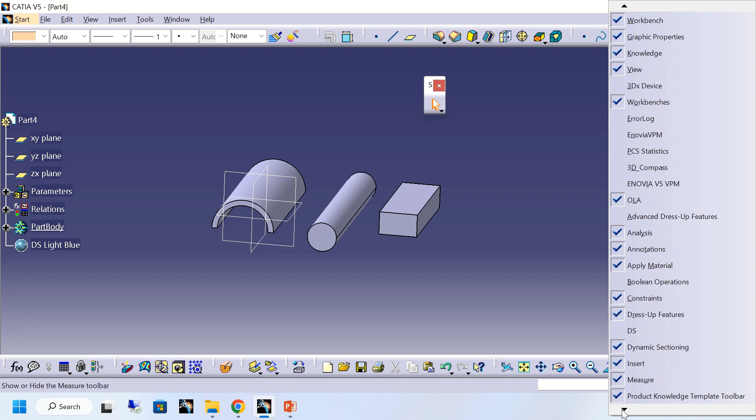अब मेजरिंग टूल नहीं मिलेगा तो यहाँ पे जाएंगे, here this should be checked on, or you can go to insert and here you will get some measuring tool.

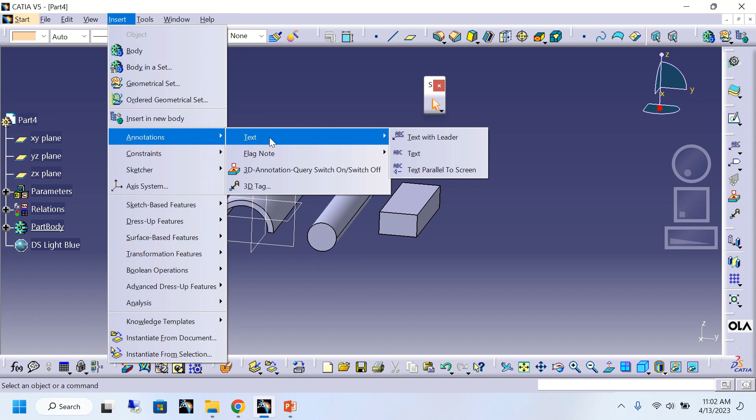टूल्स व्यू मेजरिंग टूल कहाँ गया? जैसे हियर इट इज मेजरिंग टूल। सो यहाँ पे मेजरिंग टूल वर्कबेंच में 3 टाइप का

3 टूल्स रहता है। एक है मेजर बिटवीन, एक है मेजर आइटम, एक मेजर इनर्शिया। मेजर बिटवीन मतलब 2 ऑब्जेक्ट के अंदर डिस्टेंस कैलकुलेट करना है, या कुछ एंगल कैलकुलेट करना है, या कुछ भी 2 ऑब्जेक्ट के बीच में वो कैलकुलेशन को मेजर बिटवीन बोलते हैं।

इट मे बी योर पार्ट प्रोडक्ट, देन बॉडी, ज्योमेट्रिकल सेट, ज्योमेट्रिकल एलिमेंट। So then second one is measure item. As the name defines item, so the item may be your part, product or body.

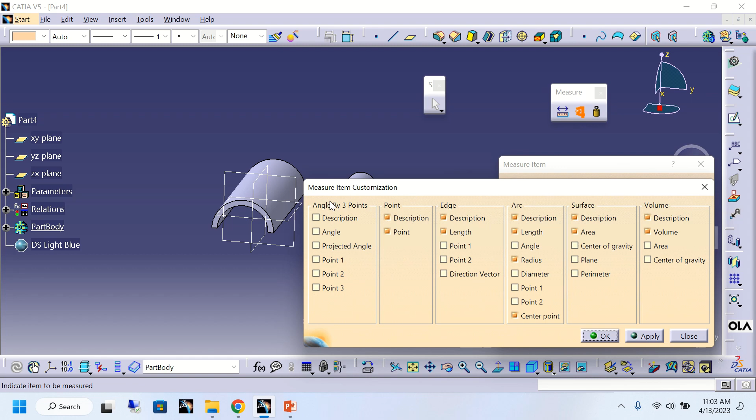And one thing you remember, in measure item you will calculate the properties of the product. Now, the third one is your measure inertia. Measure inertia, there are 2 types: one is 3D inertia, measure inertia in 3D, and measure inertia in 2D.

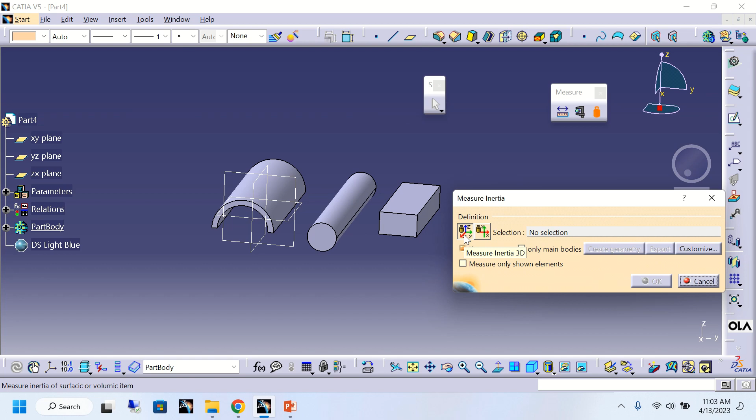So one by one we will cover the measuring tool in Catia. अभी क्या करेंगे ना, मेजरिंग बिटवीन। तो मेजरिंग बिटवीन में पहला मेथड है कि measuring between, it is the normal measuring between, and the selection mode you can define the selection mode, selection 1 and selection 2.

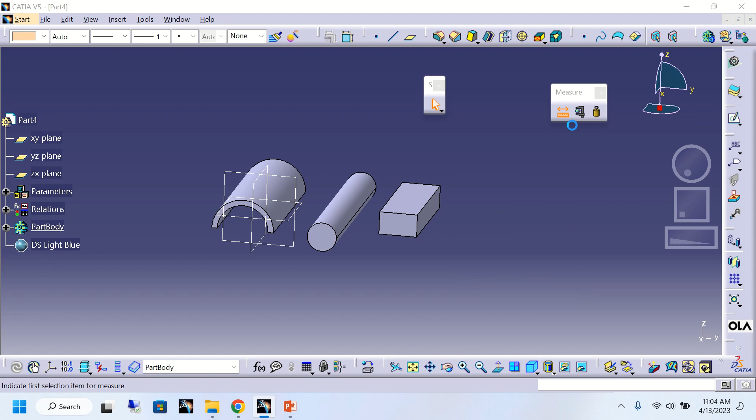As you can see here, any geometry means it may be your part, product, body, line, geometrical set, anything it will pick. Then any geometry infinite, so any geometry infinite. So here any geometry means it may be your surface or line.

Line point, anything. And third one is picking point. Whatever the point you want to pick, I want this point distance. So this picking point I will calculate, means I can use the point only. So only point will be selected.

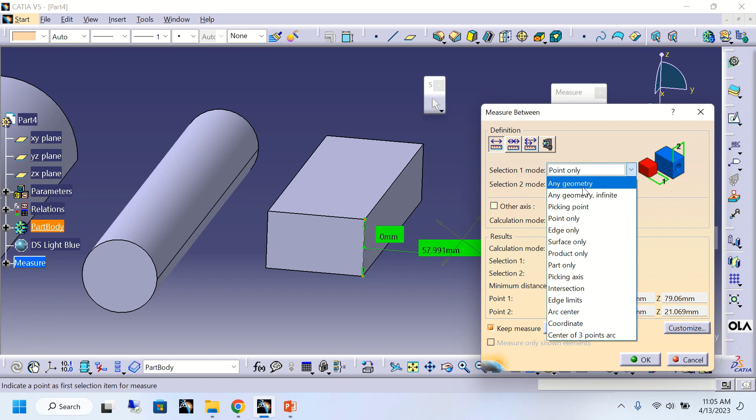Only selected. Now come to the edge. Only edge will be selected, no point will be selected. See, only edge will be selected. See, I'm pointing out the point, but point is not selecting. Only edge is selecting.

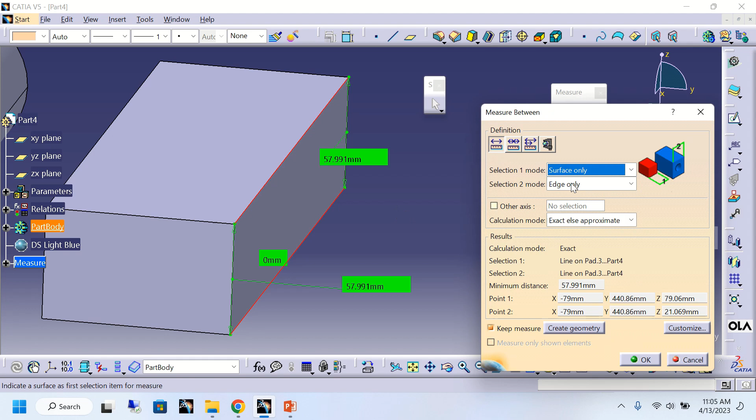Now it is surface. See, if I go with the surface, only surface will select. There is no selection of anything else. See, second one, surface, only surface is selecting.

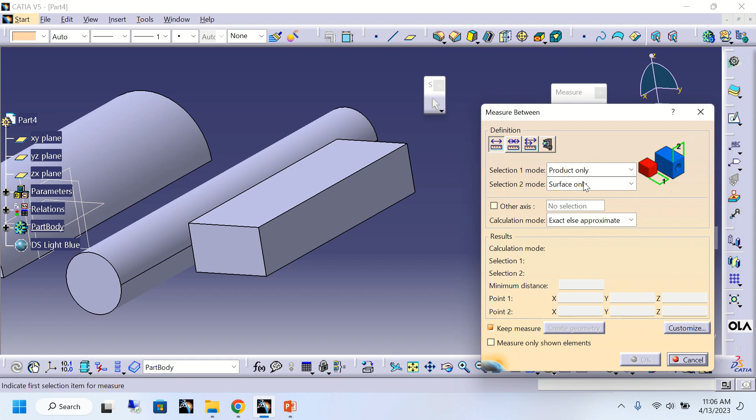Now it is product, only product. So if I go with this method, only product - see, there is no product involved in this part body. Okay, because product is the assembly tool. So if you have a multiple number of sub assembly, then we can select the product.

Then part - only part is selecting. See, this is part 1, so part is selecting. If you want to calculate part 1 with respect to another part or any geometry, from this part 2 I will create one - I want to create a plane. Okay, I want the first selection is part 1, and second one is this.

So you can see the distance is 0. Why? Because in this part 1, this plane is also coming, so the distance is 0. Now come to the last: picking axis, intersection, edge limits, arc center, coordinate, 3-point arc.

These are all about the selection mode in measuring. Now see, in measuring also there are different types of measuring. One is measure between - measure between means two selections will be selected.

Then second one is measure in chain mode. Chain mode means first I will take the reference, and with respect to the first reference, I calculate the second distance. So this will be my first distance. Then I will click the third reference, and the distance will be calculated from the second reference to the third reference.

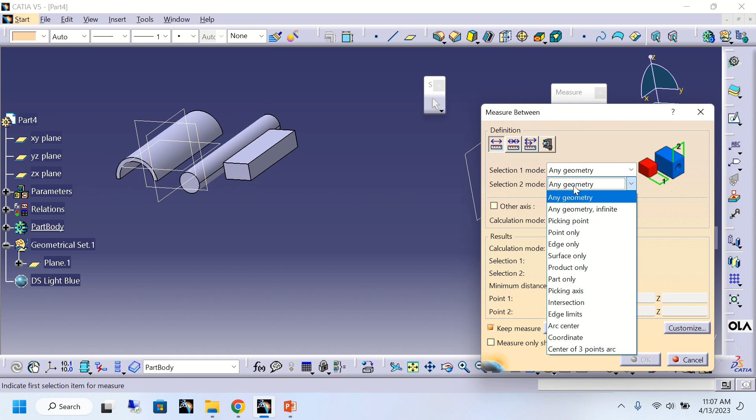For example, I will select this chain mode - any geometry, here also any geometry. So chain mode I will select, let this be my plane first, and second is my surface. See, the first thing is selected. I want to calculate the second one. Now the second distance is calculated from the second reference of the part.

Now similarly, the example of calculating measure between in fan mode. Fan mode means the distance will be calculated from the first reference. Whenever you click on the distance, the reference will calculate the first distance. Later, this is my reference - first one, second one.

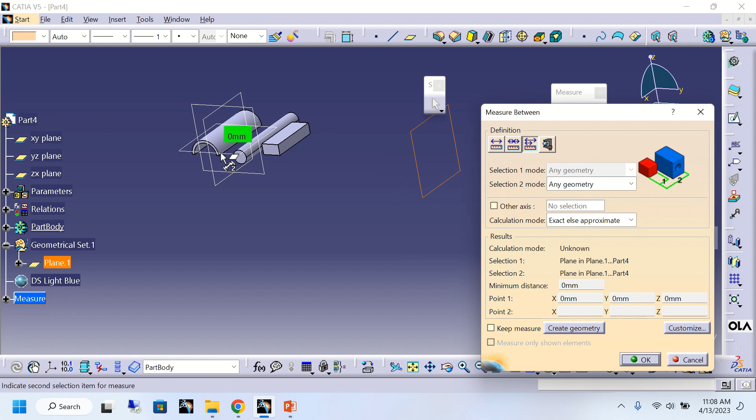You can see the first one, first distance, and with respect to this plane I will select the ZX plane. So you can see the distance - it is calculating the distance from the first reference. That is all about fan mode.

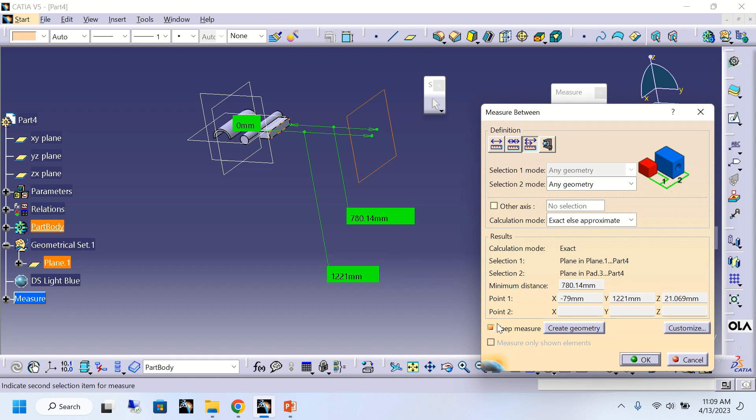And you should remember one thing: keeping measure. Whenever you want to keep the measure, after clicking OK, it will keep it in the 3D panel. Okay, this option is there.

Now in these three methods, one is calculation: exact else approximate, exact and approximate. Okay, these methods are there. Then the result will show according to the customized setting.

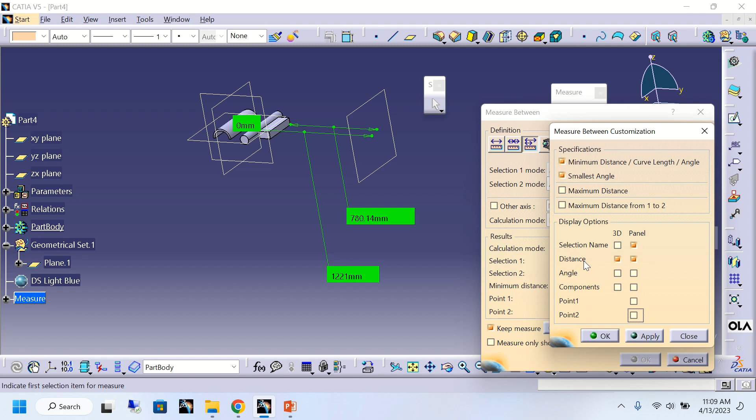See, if I give you the minimum distance and smallest angle - minimum distance and smallest angle - and I don't want this point 1 and point 2, apply OK. You can see minimum distance. So the minimum distance between...

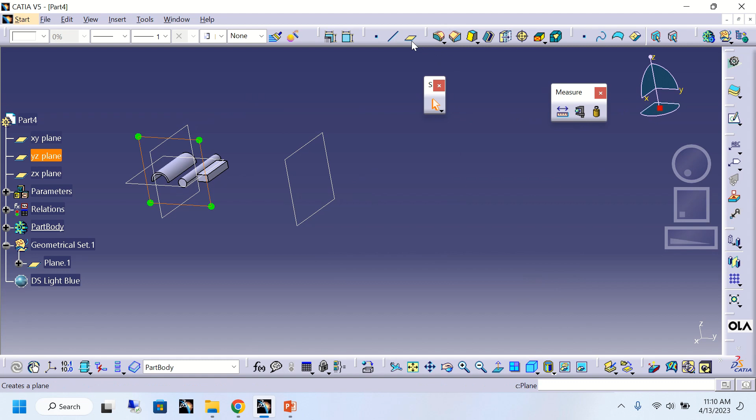Okay, I will create one spline.

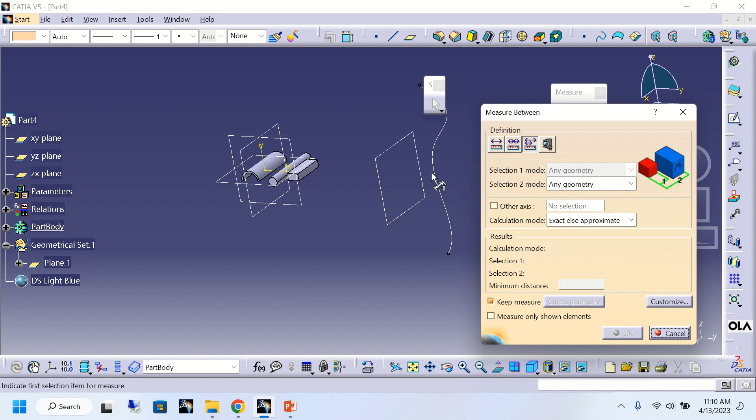Okay, so here I want to calculate the minimum distance. So first selection, let it be my first selection, and this is my second selection with respect to this surface or this edge. And you can see the minimum distance is 0.

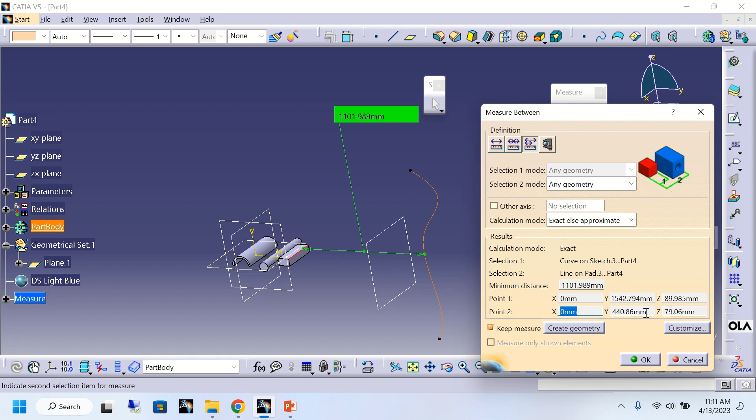If you want the point, the first point and second point of the minimum distance, you can apply here. You can see the first point is x is 0, y is 1542.794, z is 89.985, and point 2 is x0, y is 440.86, z is 79.06. So in this way we can calculate the measure from this part.

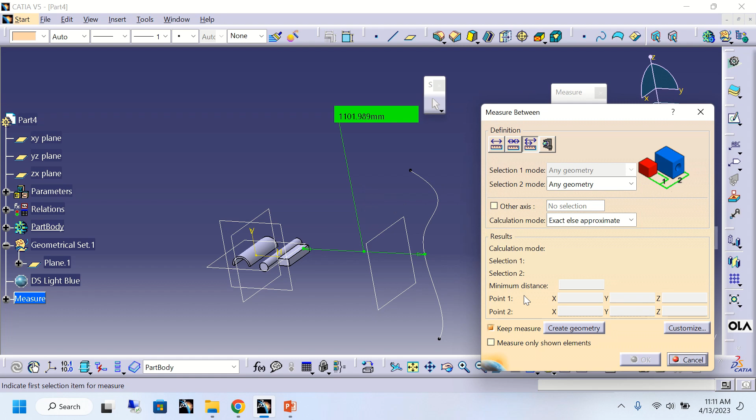Okay, now if you want to calculate the angle also, it will show you the angle. You want to calculate the angle from this point to this edge. I will calculate the angle. So what is the angle between it? It is calculating the distance is 21.069 and the angle is, what is that, 90 degrees. So if you want to calculate the angle in the panel itself, angle will be shown in this panel.

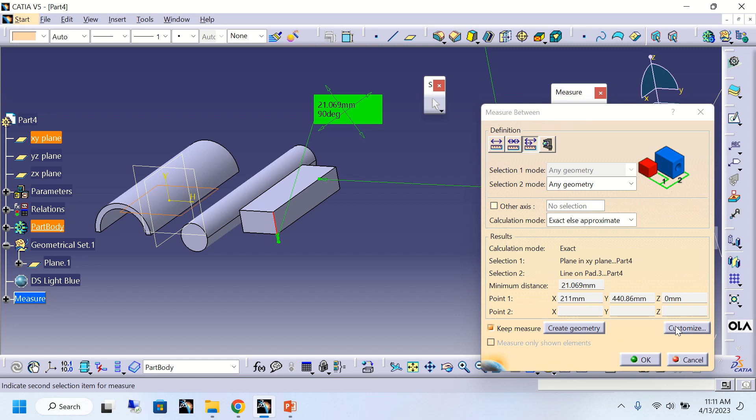Okay, now I hope there is no doubt on these three types of measuring. One is measure between, second one is measure in chain mode, measure between in fan mode. Now comes to the second one, that is measure item.

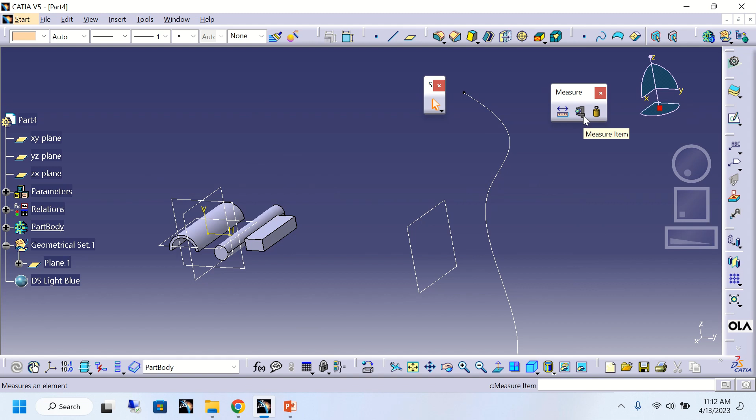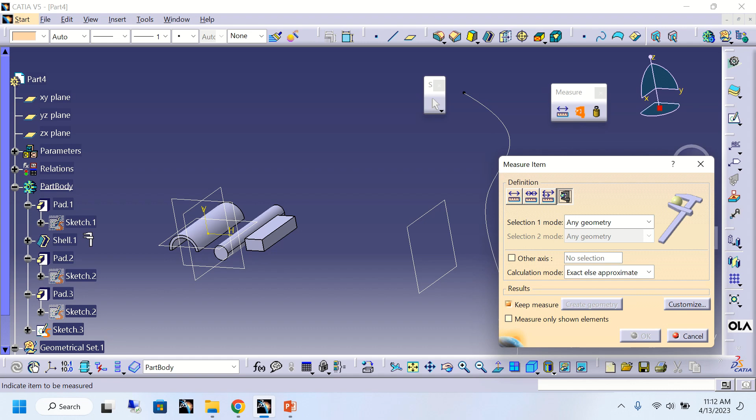So measure item, see, if you want to calculate the measure item, measure item only takes one mode. It may be your pad, pocket, shaft, or body, or any geometrical set, or any product assembly, sub assembly. Okay, so before calculating this, I will apply aluminum on this part.

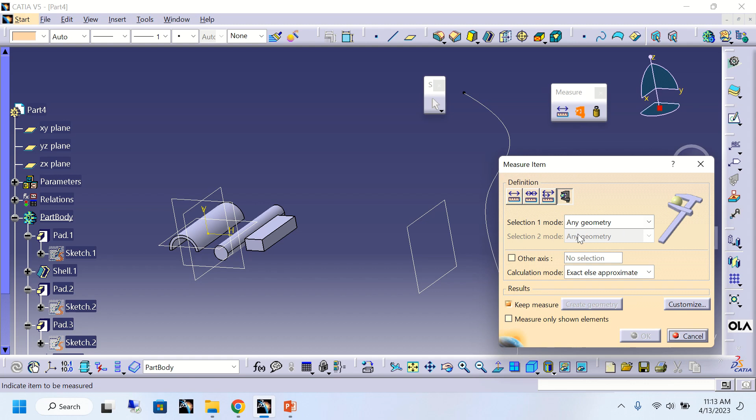Okay, then I will calculate this. So you can see, you can find this measure item here. It is measure item, okay, it is selecting only one body. So I will calculate here the pad. So here I have customized only this volume.

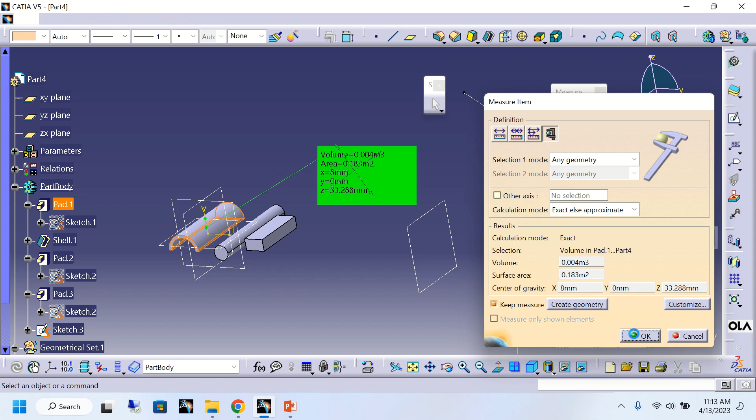If I will go with the volume, center of gravity, area, you can see volume, center of gravity and area, it is showing in the panel as well as in your home screen. And if you check on this keep measure, then keep measure will be in the screen. Click OK. So in this way we can calculate, and in this measure item we can calculate the angle.

You can see the radius of this. By using this measure item, we can calculate the radius and the distance x, y, z, center point, radius, length, what is the length of this radius. Then we can calculate all these things by using this measure item.

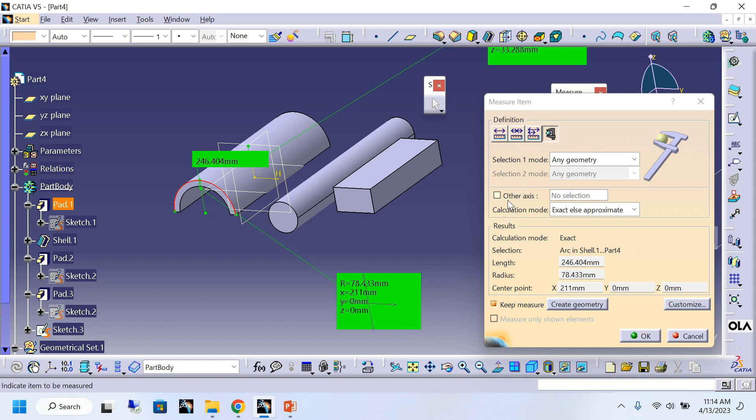Then the most important thing is your measure inertia. So measure inertia, it is a very important thing. In 3D we are calculating, you can see here, area, volume, density, surface mass, then center of gravity, principal moment, principal axis and all.

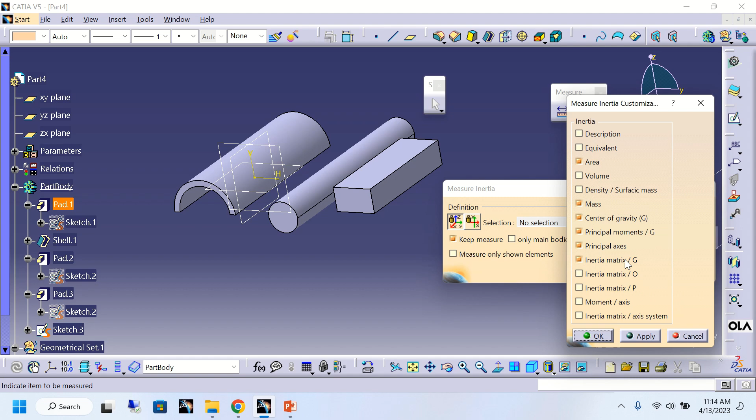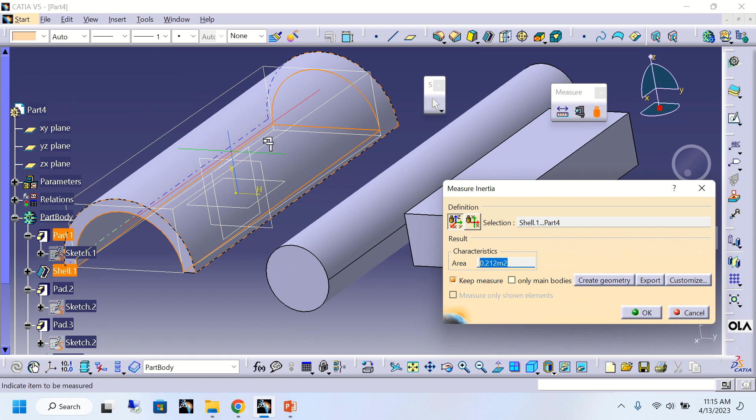Okay, I will go with this shell. Now I have customized this thing. If I will turn off all of this and I want only area, apply. Okay, you can see the area is of this pad, only pad. If I go with the pocket, it was calculating all the elements involved in the part body, but I want only this shell.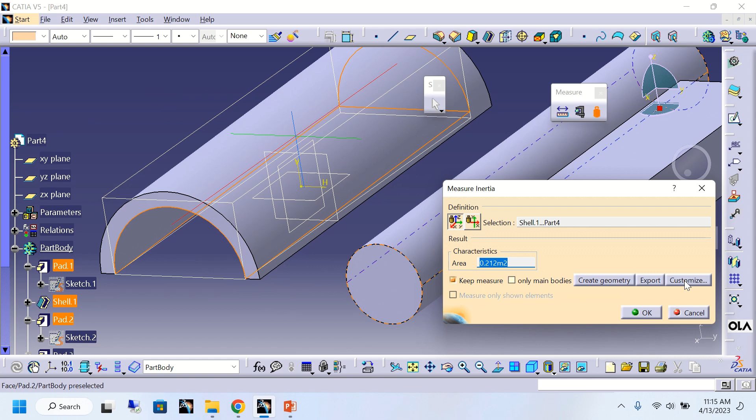Okay, here what it is saying, what it is meaning. So area is calculating, and if I will go with the volume it will be shown in this panel. If I will go with the density, density will show in this panel. Mass will show in the panel. Then center of gravity, whatever the center of gravity is calculating, automatically will calculate. As you know, this is all mathematical calculation, so I won't go into the calculation.

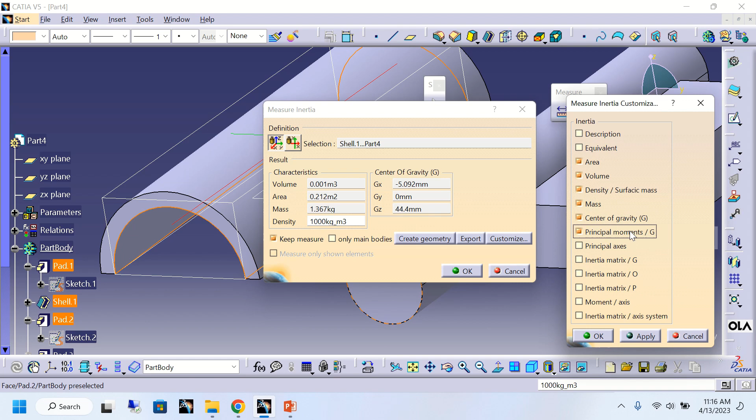Then principal moment in G. So here, most important is principal moment in G. So M1, what is M1 selecting? M1 in X, okay, Gx, you can see here.

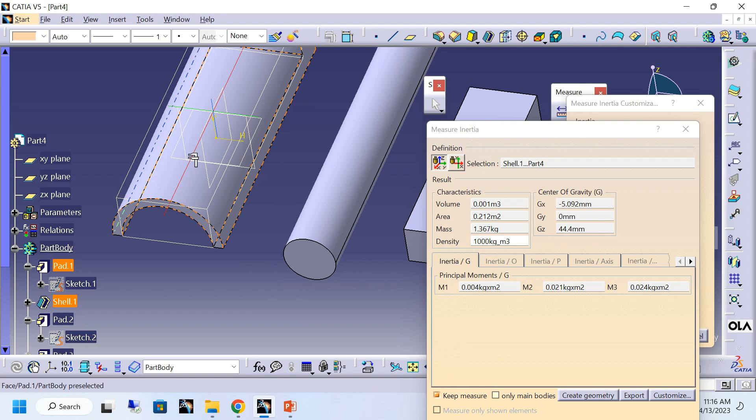Okay, this line, you can see this red line. If you see, you can see the red line. One red line is there, that is principal moment M1, and this green line is your M2, and this blue line is your M3.

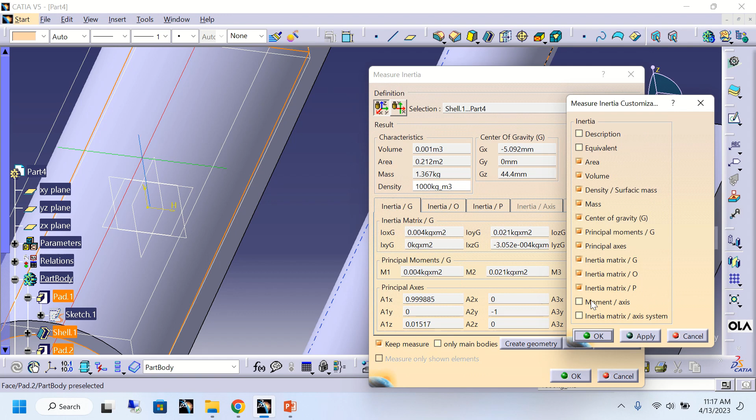Similarly, we can calculate the thing. We can give the customization, and here principal axis, inertia matrix, inertia origin, inertia matrix in point axis. We can calculate all this by using this customize option, and we can export this value also by using the export option. Let's export and click OK. You can see in this you will find this value, whatever you customized from there, we can export the value from the part body by using the inertia.

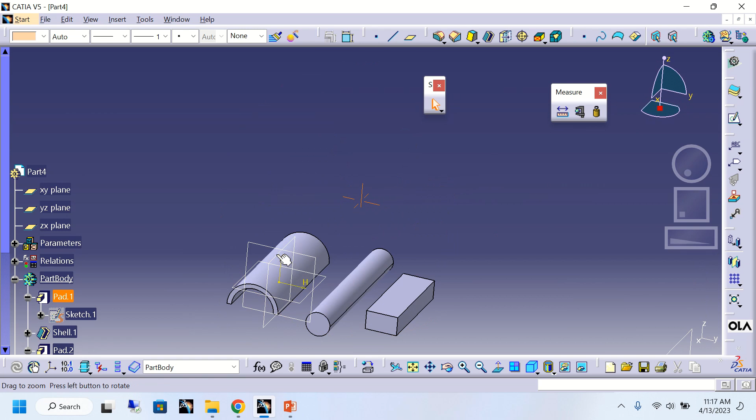Now come to the second one, moment of inertia in 2D. So moment of inertia in 2D, here we are getting 3 axes, but in moment of inertia in 2D we will get only the surface area. We won't get any volume, because in 2D we won't get any type of volume. So go to this volume.

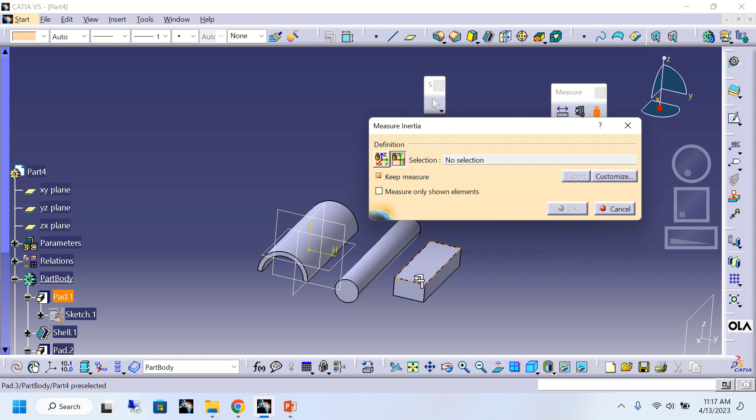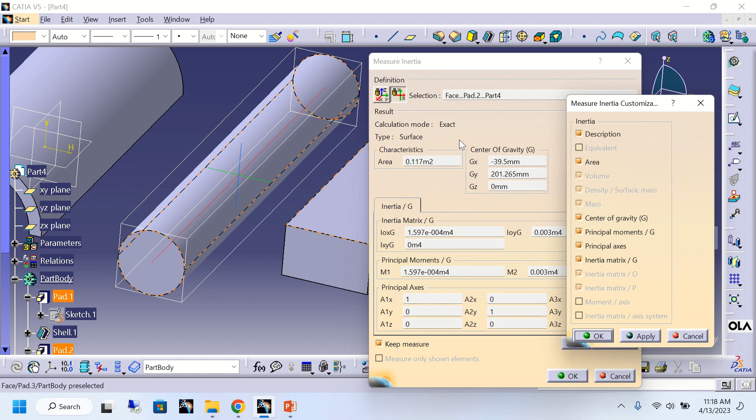Now I will want to calculate from the cylinder. Okay, so I will go to this customize. Volume is not activated, mass is not activated, because in 2D we won't get any volume, any mass, any density. We are getting only the area. If you want to go with the description, so description will be there. The description is: calculation mode is exact, type is surface. So in this way we can calculate the 2D also.

So here you can see, so the same thing here. The first one, IoxG, that is your red color axis, it is the inertia matrix in the gravity. Okay, and sorry, principal moment M1 is your red one, and the green one is your M2. Similarly in the inertia matrix in gravity, this is also showing in this way.

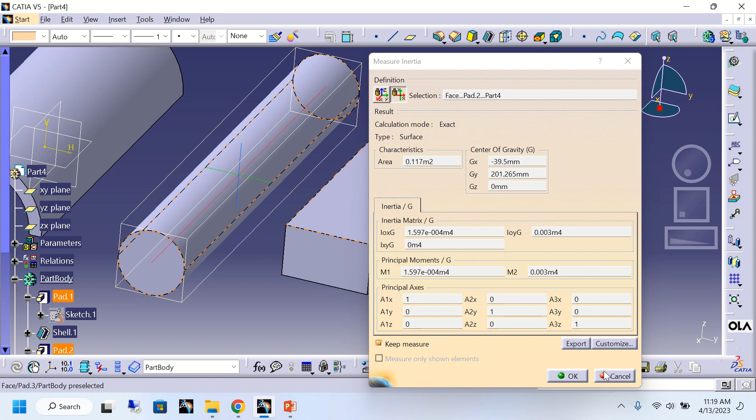So we can export this value also by clicking the export value, and export your value from the 3D, get the 3D inertia. In this way we can measure in part, in the drawing, in the design, and we can measure between, measure item and measure inertia. Hope I have given all the information about the measuring tool in Catia V5. So thank you all.